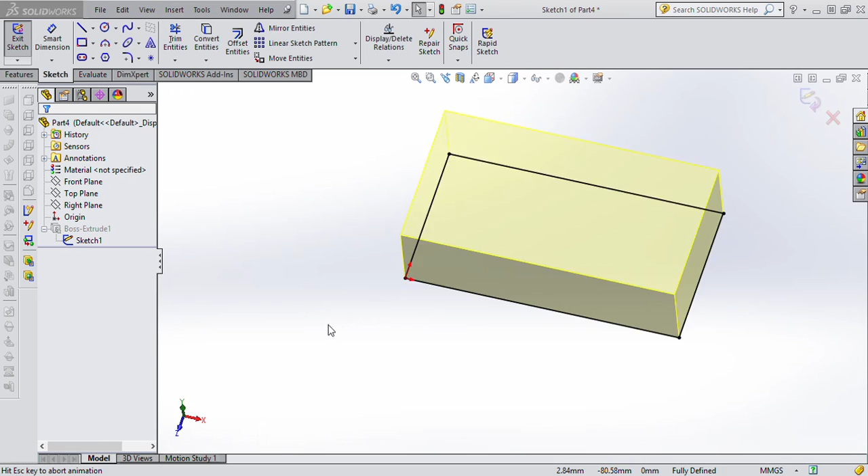If you check number 18, it seems that we made a mistake on dimensions. I'm going to come here in 3 diagrams, open the sketch, and normal to. This one should be 150, and here is 80. Now it will be much similar to the part which is given on the paper.

Okay, now select this plane, normal to, sketch and line. Using sketch, using line, I am going to create this sketch. But be careful, you have to create this line as well. All the sketches which we are expecting to create should be closed.

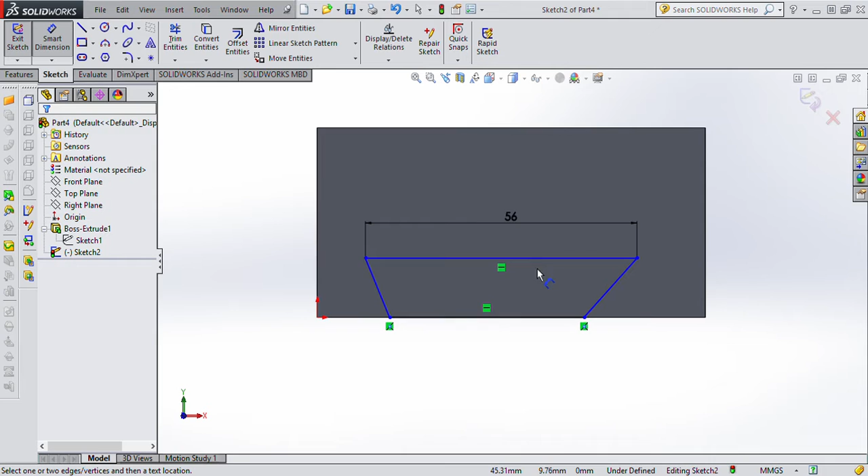Now I have to say dimension, this one is 56. Here to here is 18. Now angle between this line and this one is 60, and also among these two is 60. Very nice.

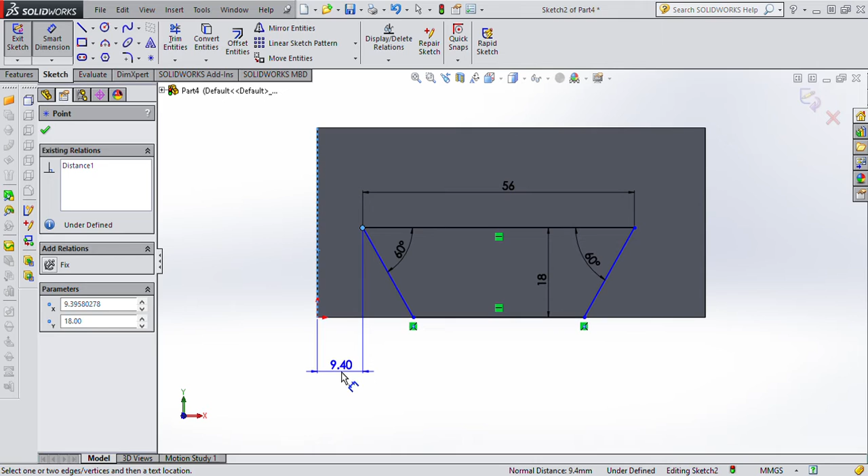80, let's say here to here is 80 minus 56 divided by 2, which is 12. Now as you can see, the colors are now black, and we can go to next.

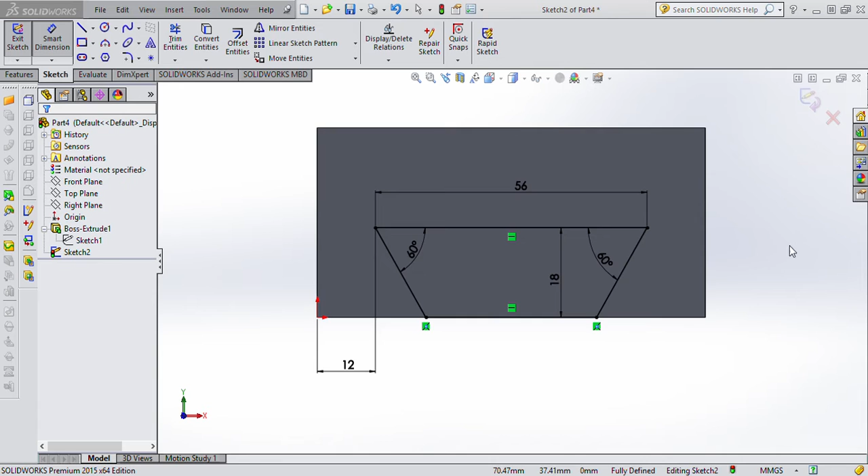ISO. Depth of this cut extrude is not given in the paper, that's why we are going to use cut extrude, and since it is not given, we will use through all.

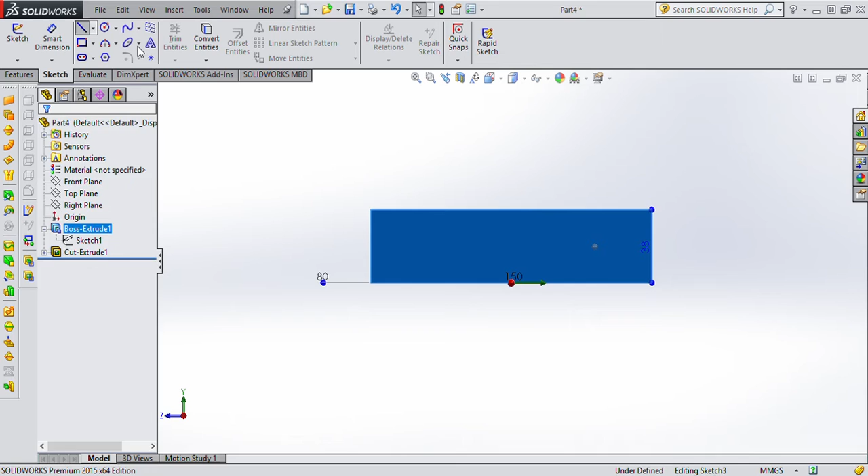Now have a look, select this plane, normal to, and now use line, sketch line, and try to create this sketch. But again, don't forget to create this line.

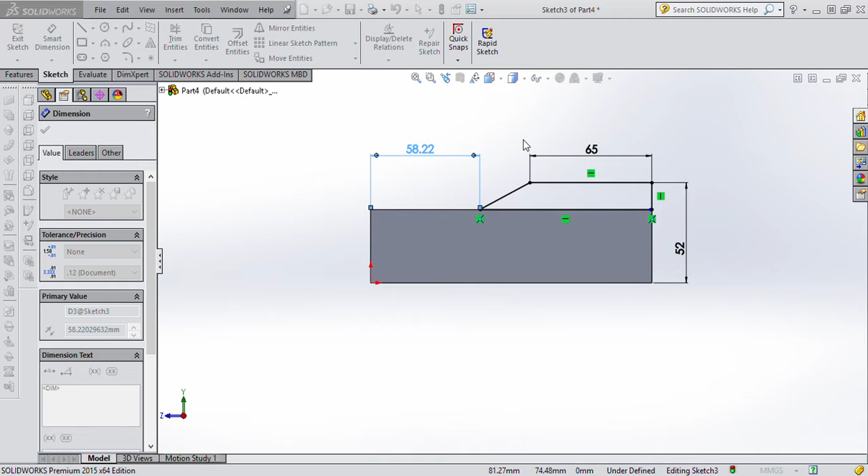Now dimension, smart dimension here is 65. From here to here is given as 52, and point to this edge is 60 on the paper. Okay, you have to create this sketch, it should be black, and let's continue by

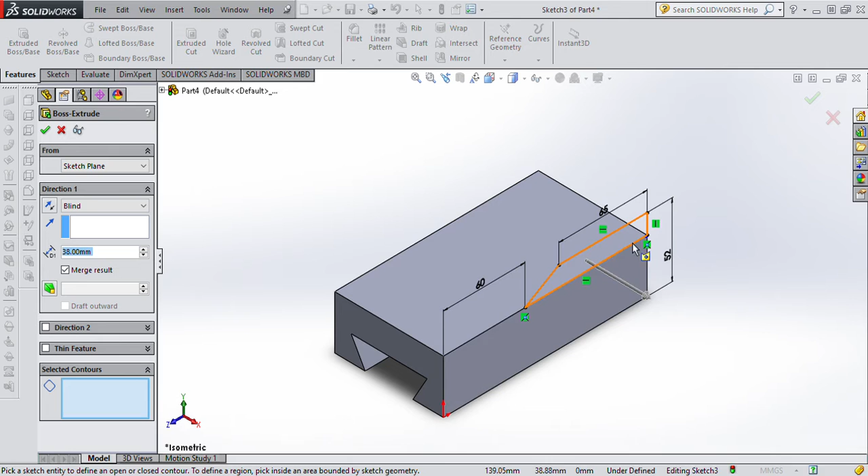isometric, extrude. Here you have to select the plane. In my case, you have to select this plane because this edge, here I have a problem. Sorry, no, you may not have this problem in your case. This is an extra line, and that's why I have to delete this line.

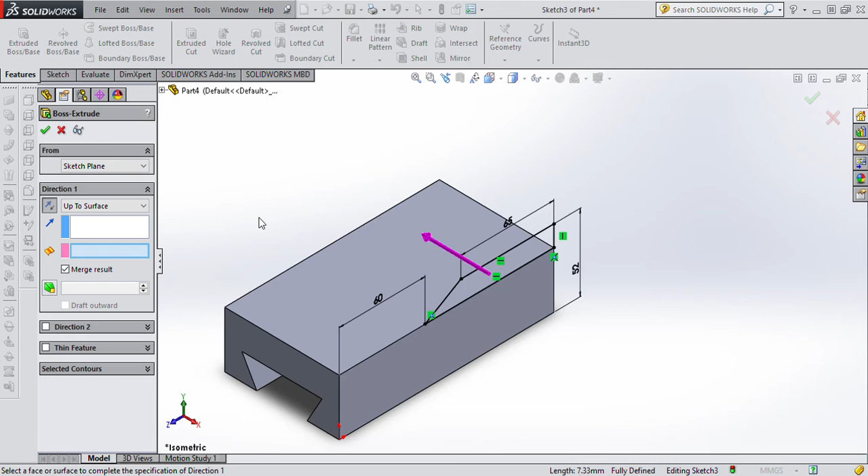Okay, now extrude, reverse the direction, up to surface. Now rotate your model and select this surface. Isometric. Here is my part.

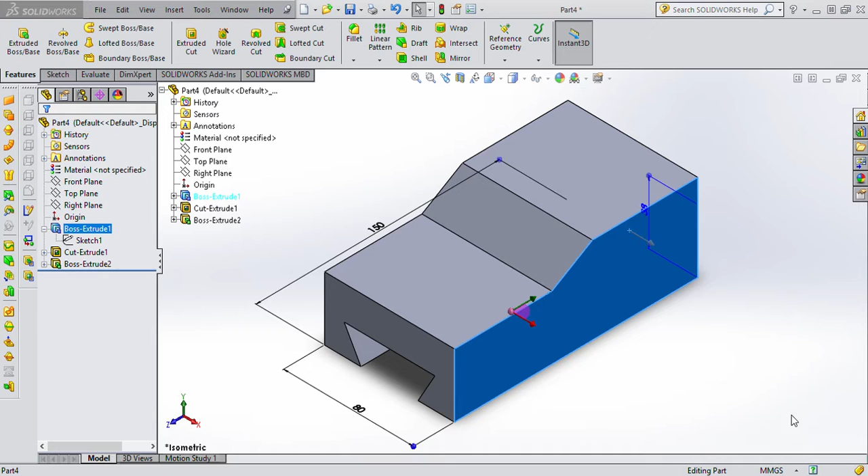Now again, I'm going to work on this plane, normal to, line. Use line and create this sketch. Be careful, as you can see in the figure, all my lines are horizontal or vertical. Okay, and I have a line here.

Now let's say dimension, let's put dimension here as 50. This one, and this line is equal, and also it is 16. These two are equal. For equality, you have to select both using control and choose equal.

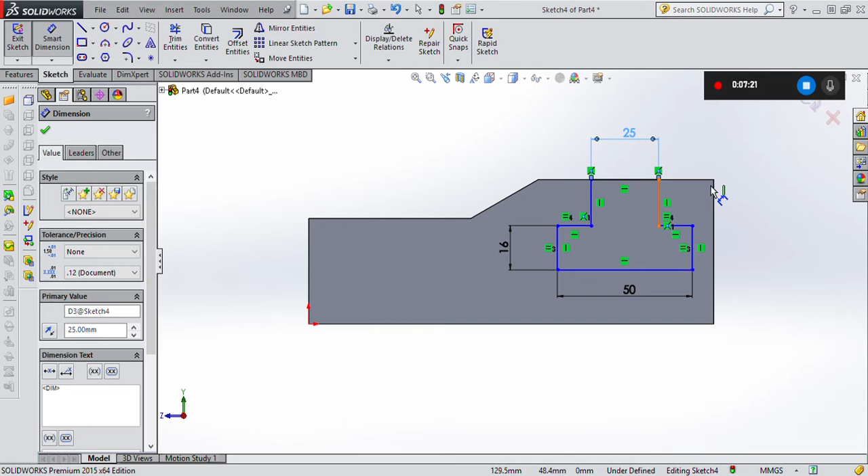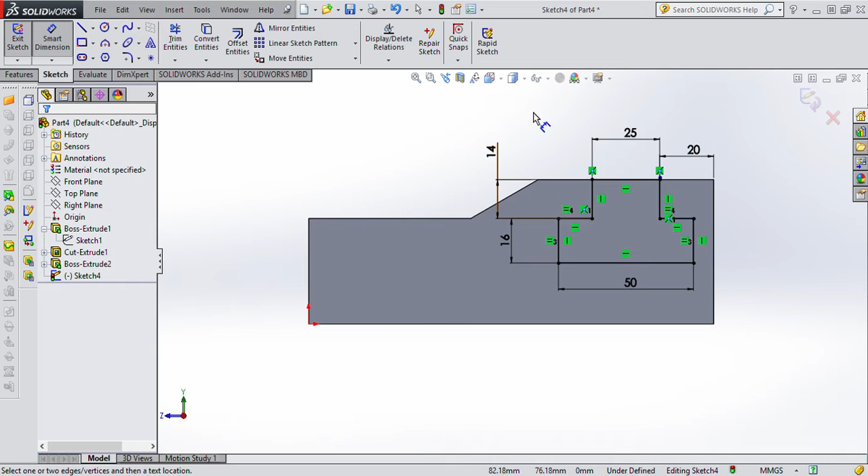Okay, here is 25. And from here to here it's 20. And also we have to put dimension for here as 14. Now, as you can see, we have a quite black sketch.

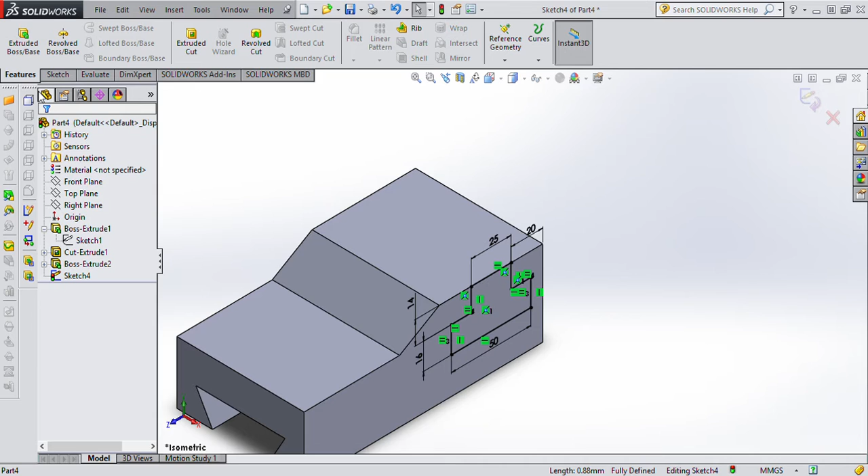Isometric feature, cut extrude. Again, I have a problem of an extra line here, but you may not have this line. Definitely, I have to delete it using the delete key on your keyboard. And now I'm going to cut extrude this one through all.

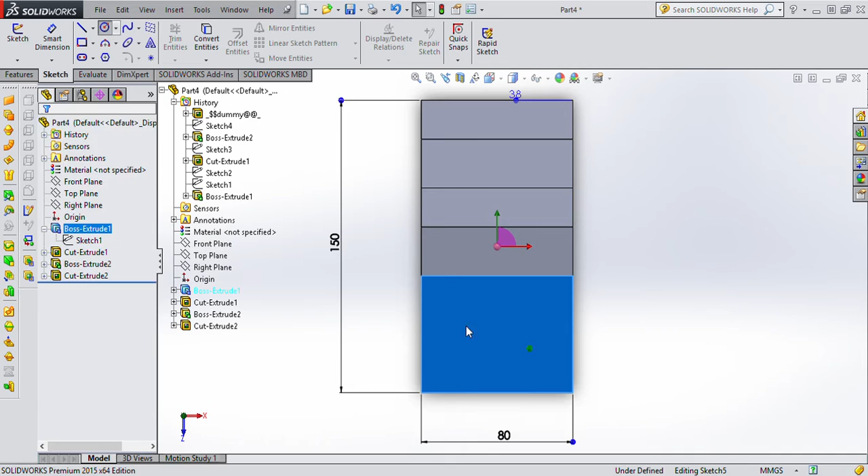Now select here, normal to sketch, circle. This is my sketch, and this one is 20. We need to say here to here as 30, and definitely this circle is not mentioned on the paper, but since it is not mentioned, we have to put it on the center. 40, 30, and 20 are the dimensions of this hole.

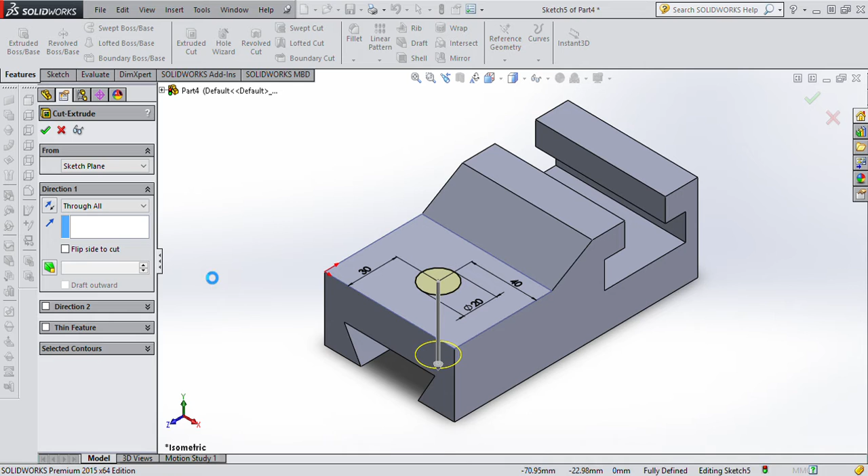Isometric, and let's say cut extrude through all, and as you can see, part number 18 is created, and you may go to save as, and you have to save this file as for 18.

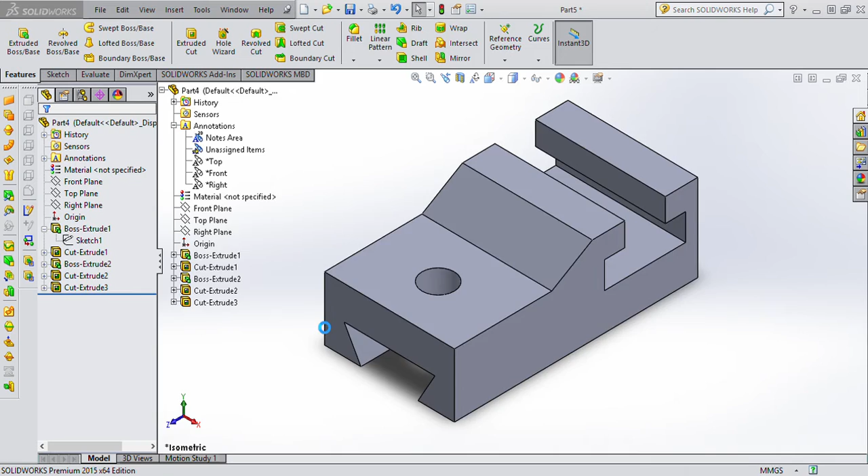Now let's go to another part, open a new part. Part 70, which is called support, is a very difficult part, a bit difficult part. That's why let's start to work on it.

Now select top, normal to, now sketch, rectangle, corner rectangle. This one is 50, and here is 138.

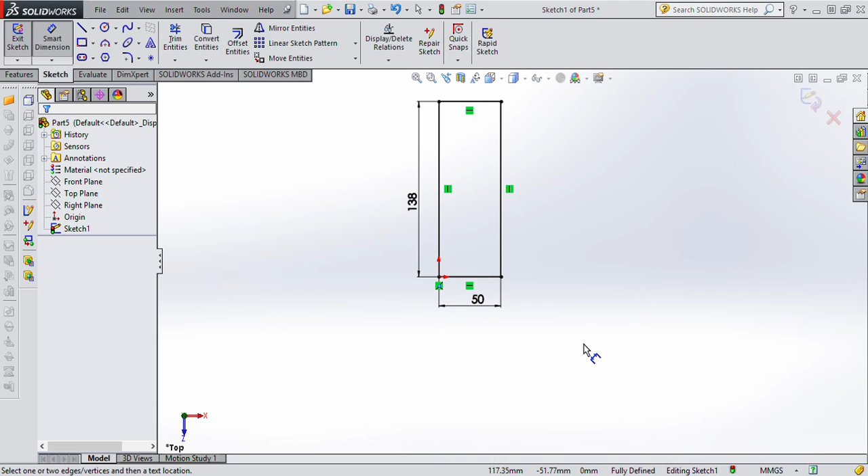Isometric. Oh sorry, this one is 138, here is 50. Okay, so this is my sketch. Isometric, I have to extrude this part as 12.

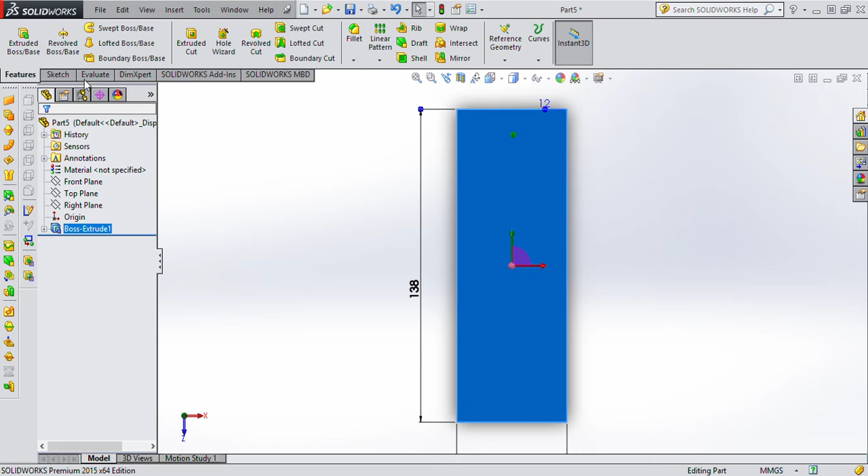Now, select here, normal to, straight slot, sketch, straight slot, make it first point, second point, and third point.

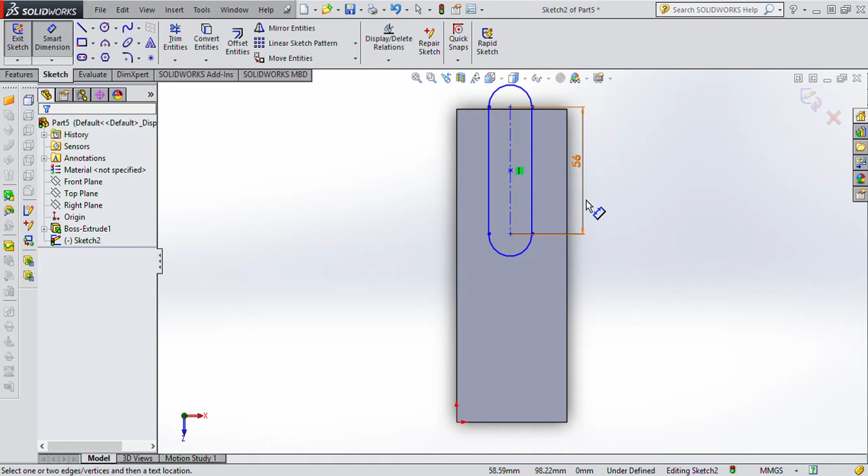Now dimension, this line is 56. Okay, this one is 6. Radius of this arc is 6.

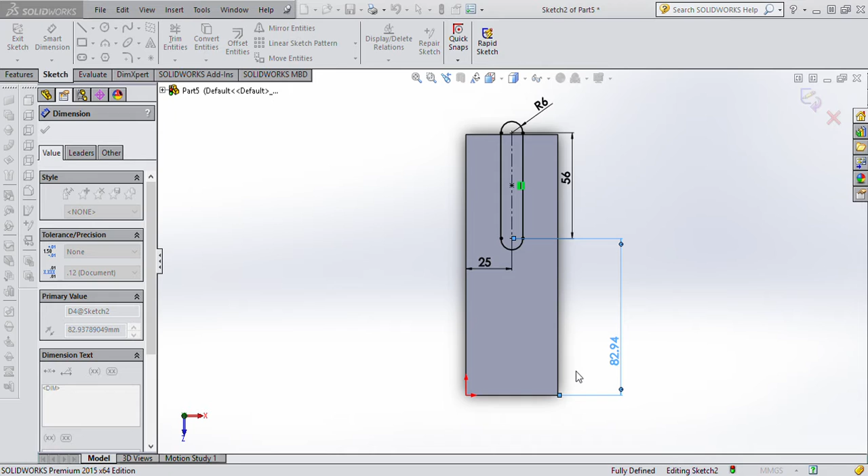From this center point to this edge, to this edge, it is 25. And the center to this edge is given as 26 plus 36. It is 62 millimeter.

Okay, confirm. You have the sketch, isometric, cut extrude, and you have to say through all.

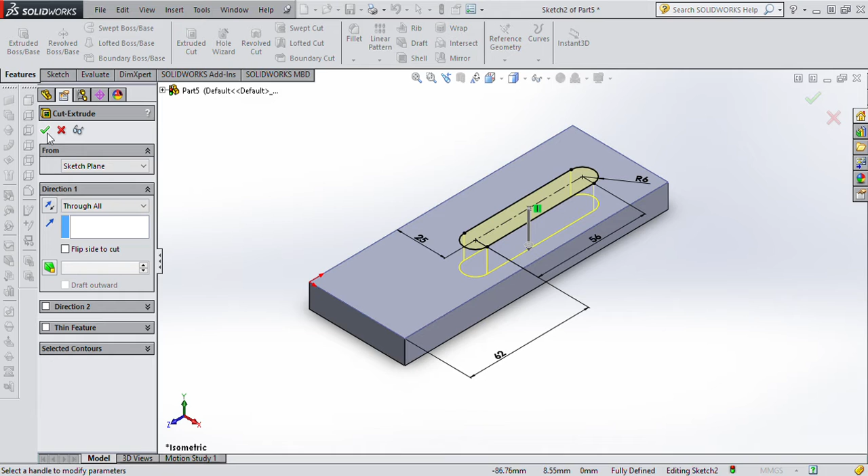Now I'm gonna show you a new technique. Actually two techniques here, but let's say firstly I'm gonna make a plane here, a plane parallel with this surface. Select the plane, this surface, and go to feature.

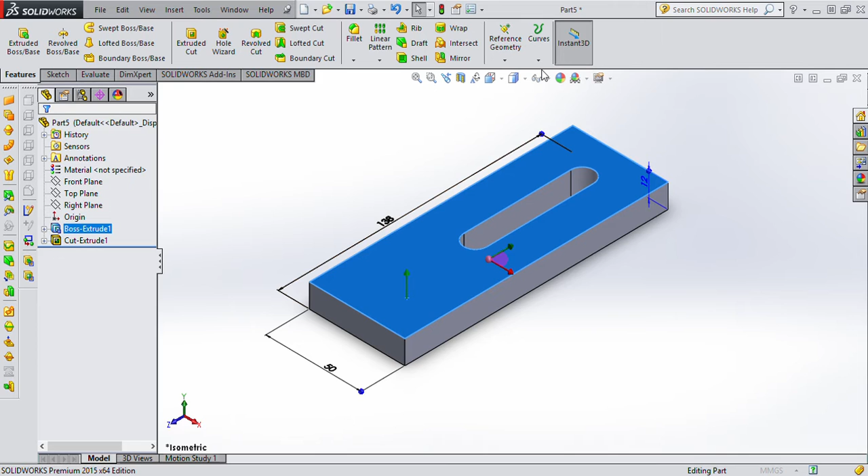Here I have reference geometry and plane. You have to come to here and select it. Now, as you can see, a plane parallel to the reference plane will appear, but the distance here should be selected as 50. It means that the distance between the reference plane and the plane I'm gonna create is 50.

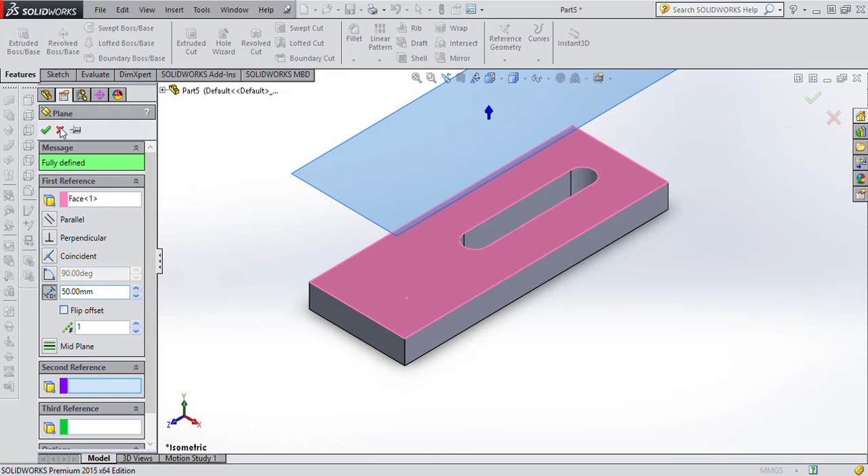Now, firstly I'm gonna select this plane. Okay, normal to, sketch, and a circle. Make a circle here. Dimension of this circle is 40.

Center to edge of this circle, center to this edge, is given as 26, and center to the sides is not given. That's why we have to put it on as a symmetric way as 25.

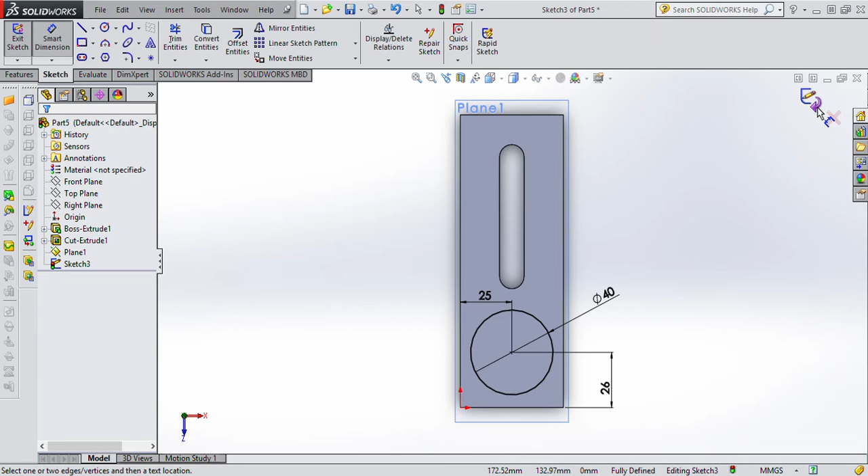Now confirm your sketch here. You have to confirm it. It will be closed, isometric. Now we have a circle here.

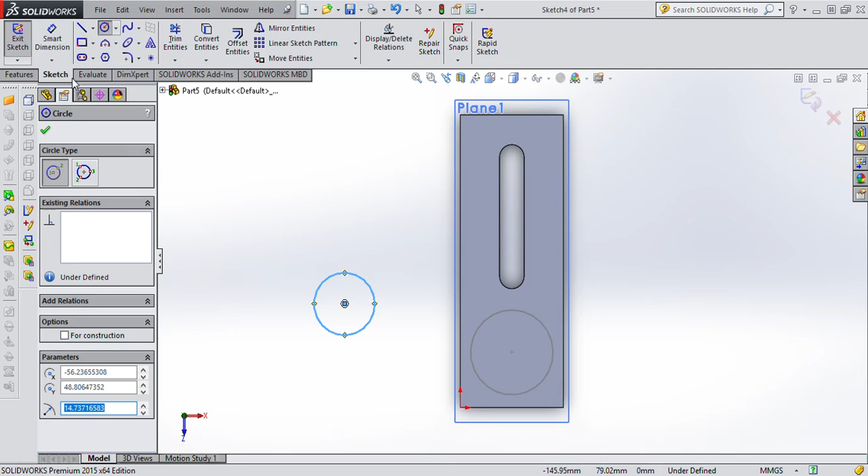I'm gonna select this plane and make another sketch here. Select the plane, normal to, sketch, and make a circle. This circle, diameter of this circle, is 30.

Okay, and let's say this circle is concentric. You have to press the control key and make it concentric with this circle.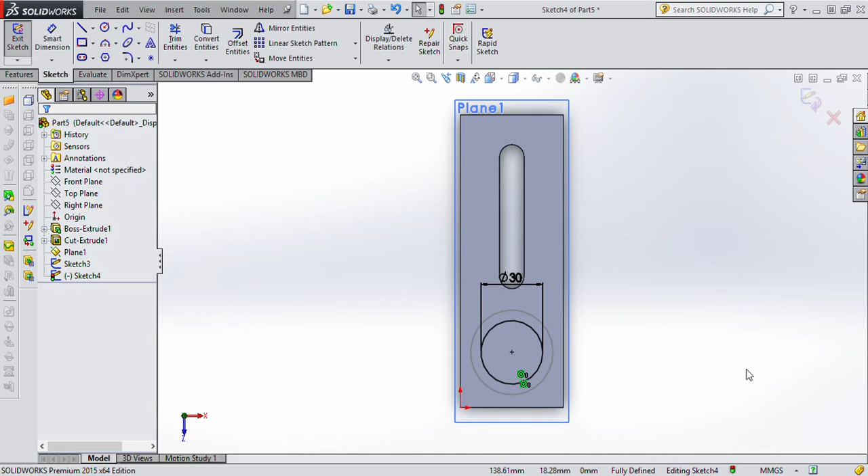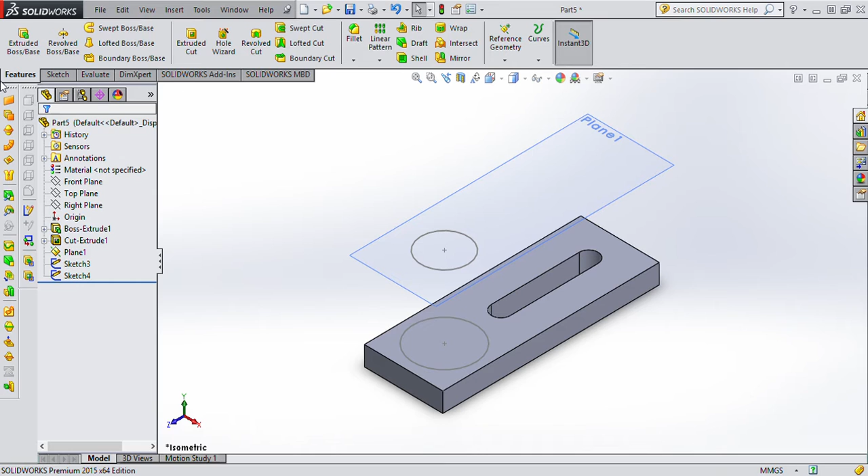Now go to feature and let's select loft. For loft we should select two sketches. Firstly we will work with, as you can see here, you can open your tree diagram here. Firstly I'm gonna select sketch 3, which is located on the base plane, and then sketch 4 on the new plane.

Remember, in a previous lecture I tried to show you a loft example, but if you change these points, look, the shape of the loft will change. So these points are very, very important actually.

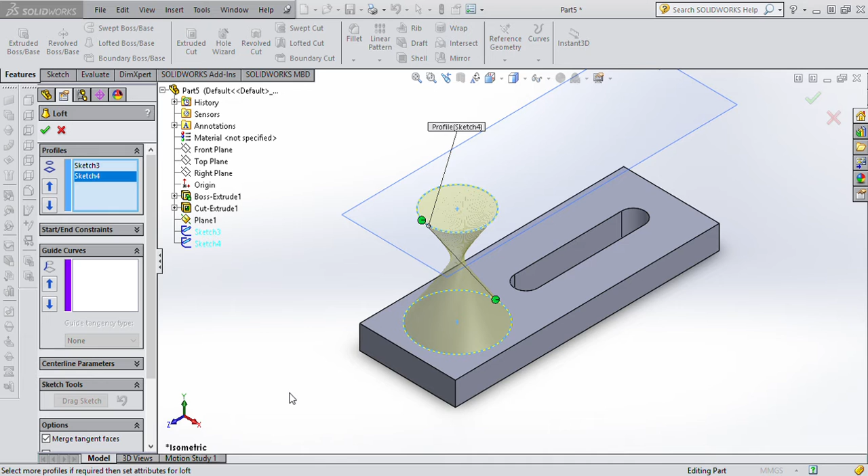That's why I'm gonna have a look on the left here. Okay, ISO, look, I'm gonna select this plane, and now I'm gonna put this point on the farthest possible location.

And this one also on this point. So if you do so, look here, I'm not able to move this point more, but I can shift this point to this point, for instance this one. But if we do so, look, this is the center of the circle and here is a point which I'm gonna put.

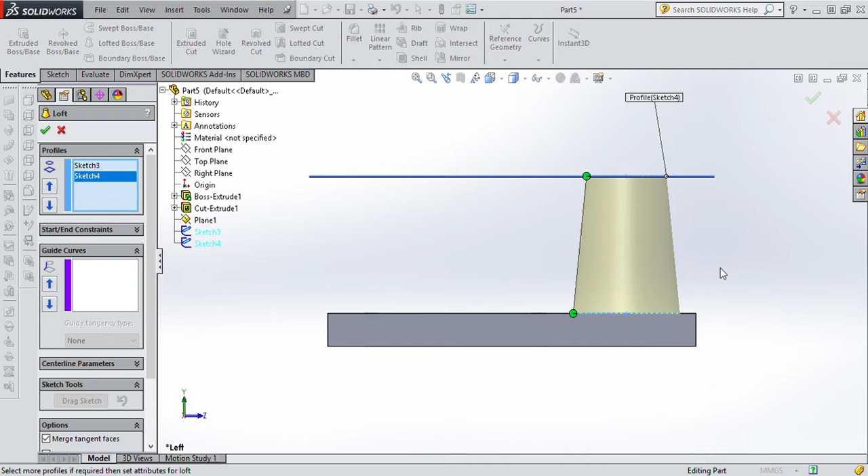Okay, on the farthest point, and this one is very far from the center. That's why, the parts which will be created here, we can be sure that this is a conical part. Now isometric, confirm.

Okay, now we already used this plane and we don't want to see this plane, but if we delete this one, definitely this sketch will be deleted and the feature will be deleted. That's why we have to hide this plane.

Two ways are possible: one is hiding the plane from here by right clicking on the plane. It means we are not gonna use this plane, and whenever we need we can come back here and click on show, and definitely the plane will appear. So at this time please hide the plane because we don't want to see this plane again.

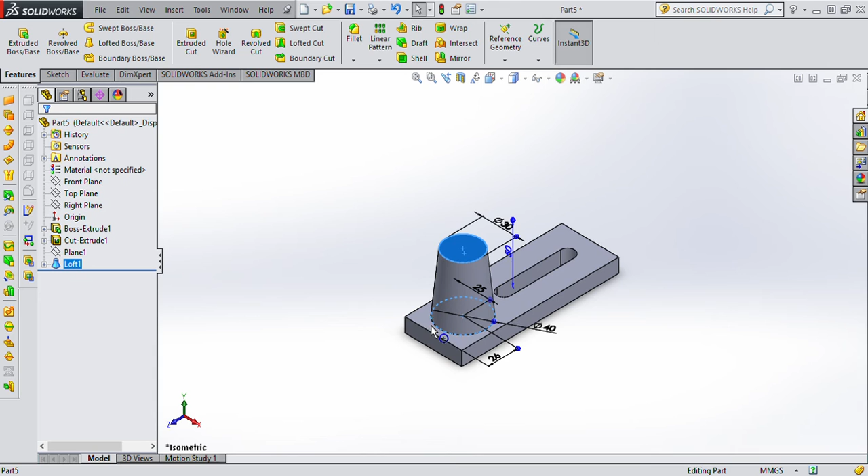Now select here, normal to, circle, make a circle from the center of this point, but if you have problems with the centers you can create this circle outside of the part, for example as me. Okay, this one is 18.

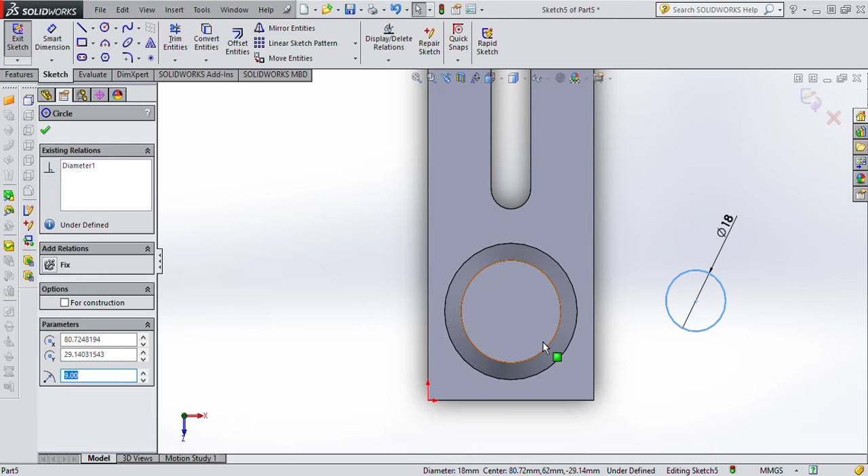Okay, and very quickly we can say that this circle control with this circle is concentric. Now we made a concentric circle on the plane, on the top of the perspective. Look here, I have a circle, and now I'm going to follow up my way with features and extrude through all, cut extrude, sorry, through all.

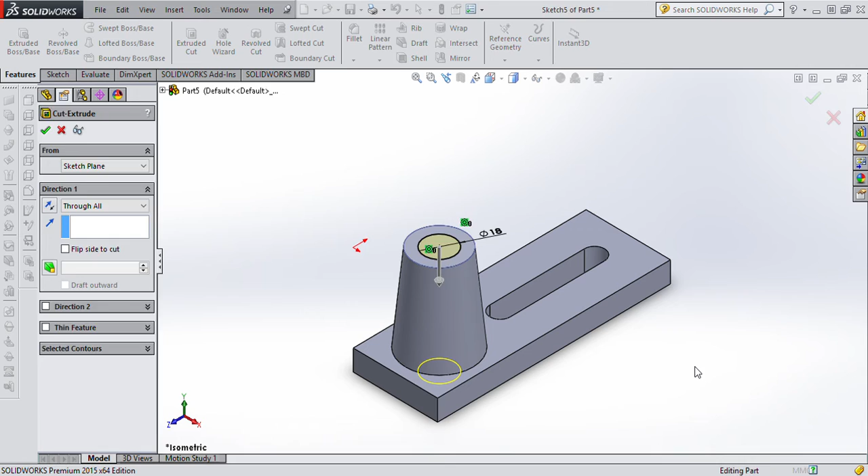Now again I'm going to create another plane. Look here, select here, and then reference geometry and plane.

Now firstly, the plane which I'm looking for is not on this direction. That's why here select flip out offset, okay, and put the distance as 6 millimeters, and confirm the plane. Now as you can see we already created the second plane, which is called plane 2.

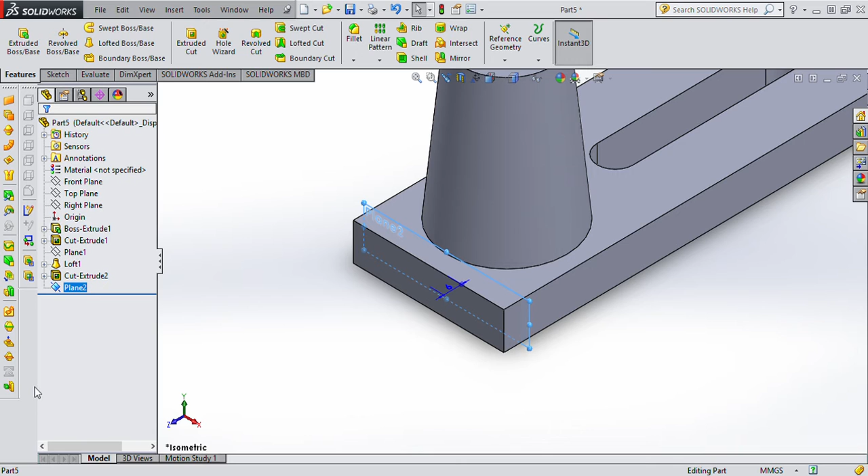Now select plane 2 on your tree diagram and normal to. If you have a problem with the size of this plane, you can pick this point and increase the size, as I did. But you have to select the plane, sketch, and line.

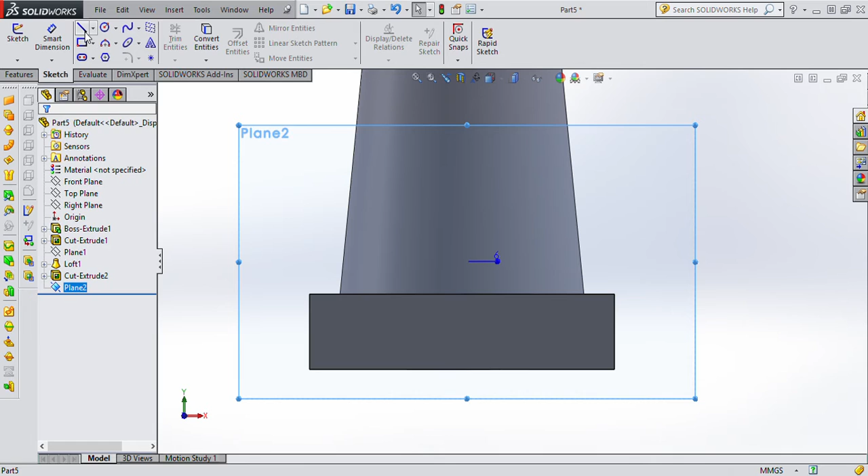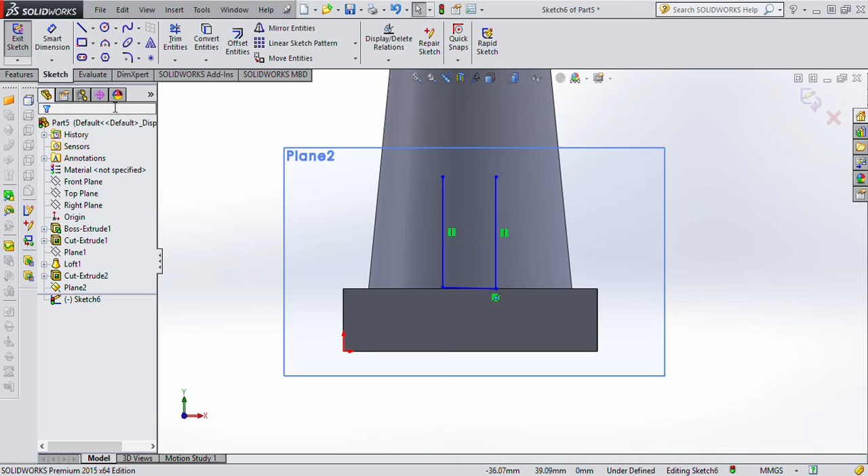First line up to here. The second line is here. Now you may use 3-point arc: first point, second point, and third point. Now I have this sketch.

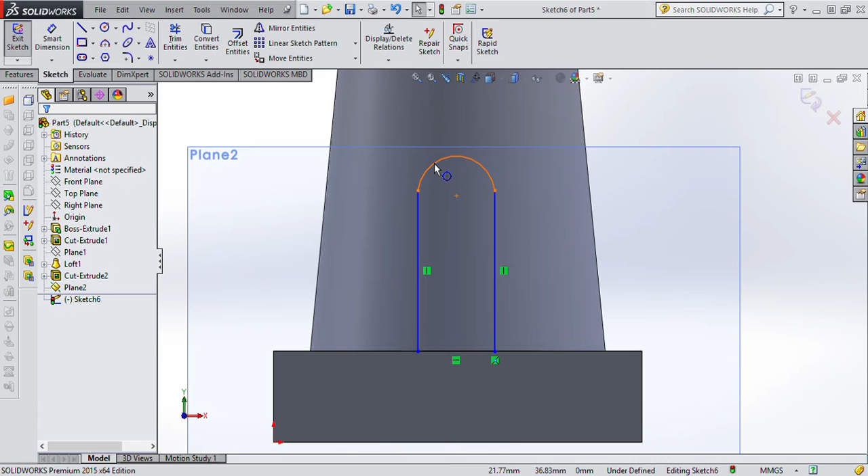Now I'm going to say this arc, control this line, is tangent. Look, the tangency sign will appear here. This one is tangent with this line, okay, very good.

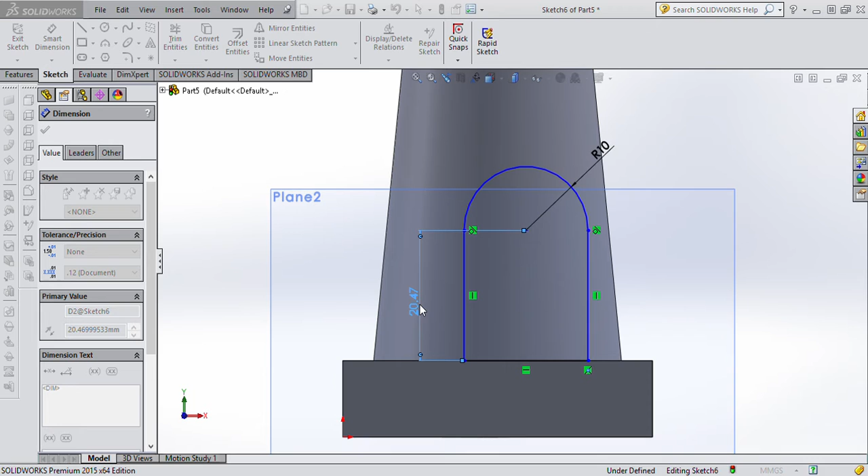Dimension: radius is 10, and the height between this center and this line is given as 28, and definitely this center to this edge should be 25.

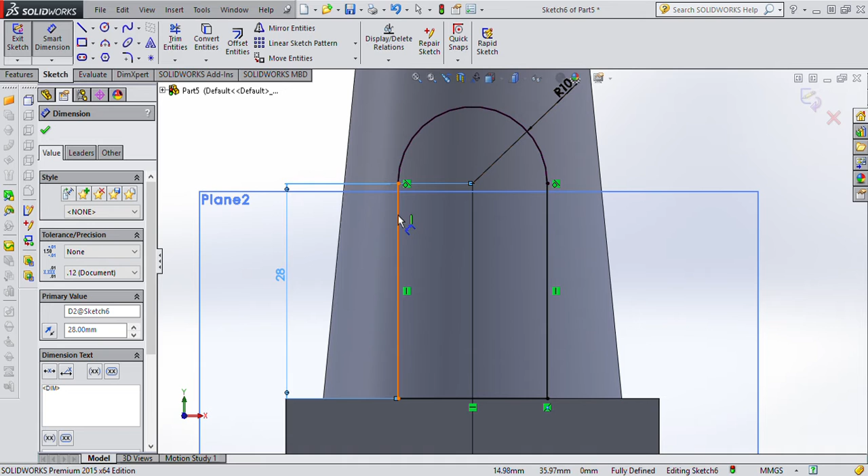We made a very good sketch here, but be careful, this circle should be tangent to this line. Line and circle, as you can see here, should be tangent, and these two lines are vertical, and this one is horizontal. So if these signs are not appearing on your model, your model will be blue. Symmetric.

Now feature, extrude, let's say up to surface, but which surface? Definitely we have to reverse direction and select this surface. Now we have a very fine extrusion towards this conical part, okay, and confirm it.

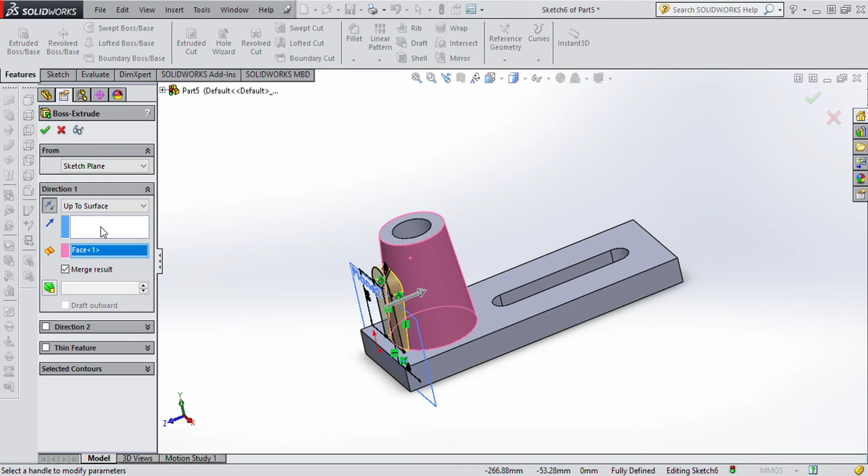Look, as you can see here, let's have a look from this side and this side. Very finely it is extruded towards the conical parts. Now I'm not going to use this plane again, so I'm going to hide it.

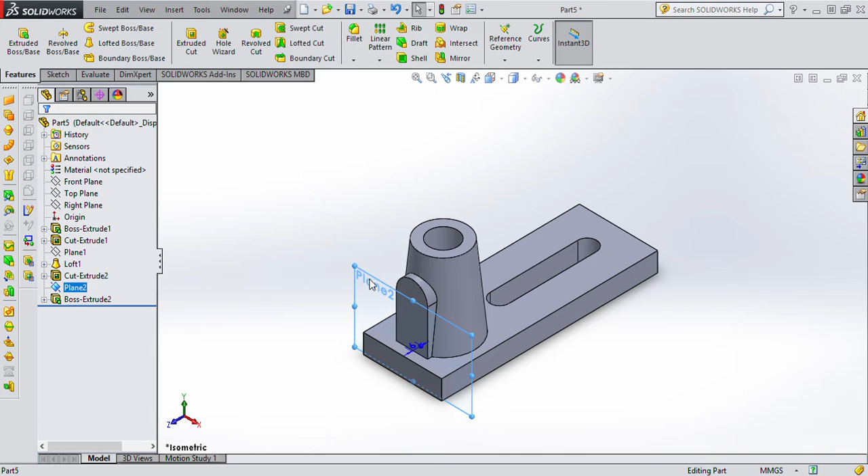Now select here, normal to, make a circle. Dimension of this circle is 10, and let's make this circle concentric with this circle by control, it will turn black. Isometric.

Now features, cut extrude, up to surface. This time we're not going to cut this one through all, we just want to cut only this side of this part. That's why up to surface, and select inside of the hole.

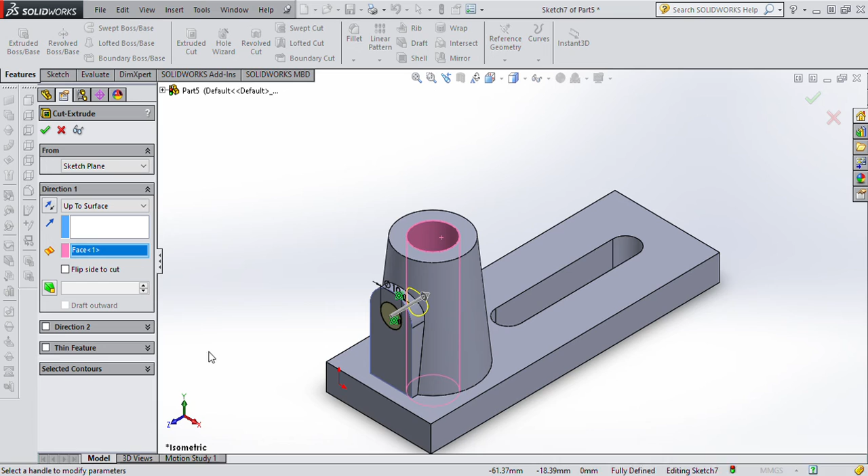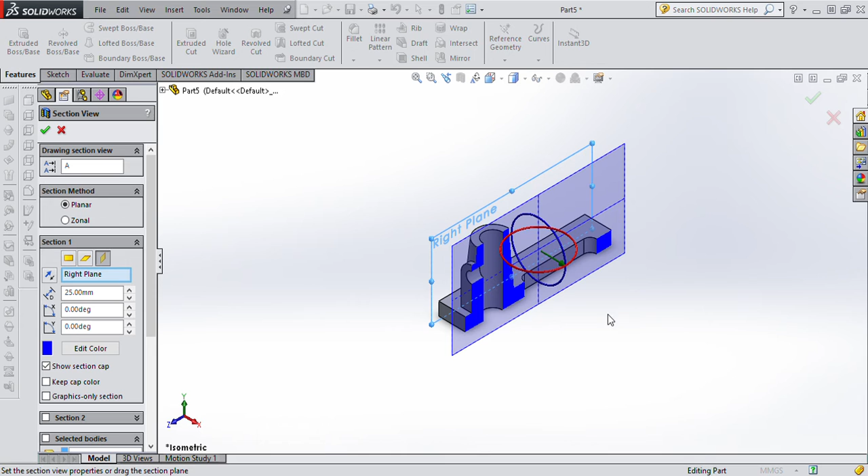Confirm it. Now if you select here right, and section, normal to, sorry, isometric, you can see the section view here, the hole is not through all. It's not through all, it is just placed on one side of the part.

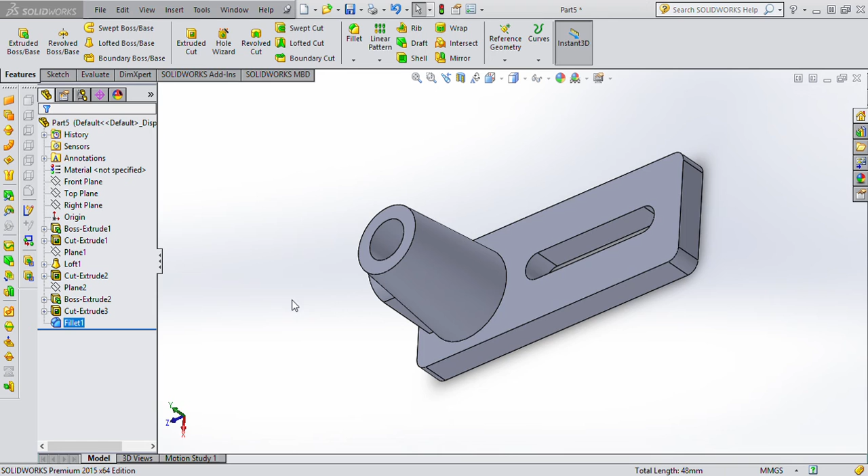We just need to make a fillet here as 5 millimeters. This one, control this one, control here, and control here. Fillet, 5 millimeter, and confirm. Now all the corners are filleted, and this is number 70 on your paper.

Now please open a new page.

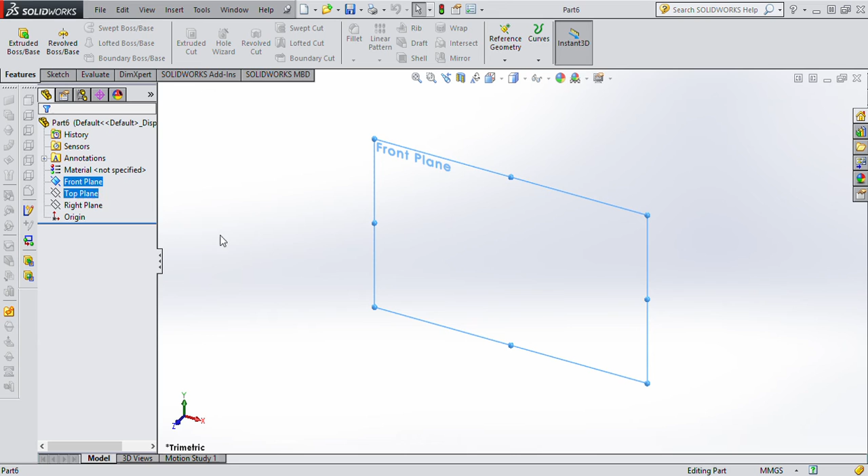Here I'm going to work on front plane, normal to. Sketch rectangle, corner rectangle, definitely. Start as always from the origin point and make a rectangle.

40 and 120. Features, extrude, 20, and confirm.

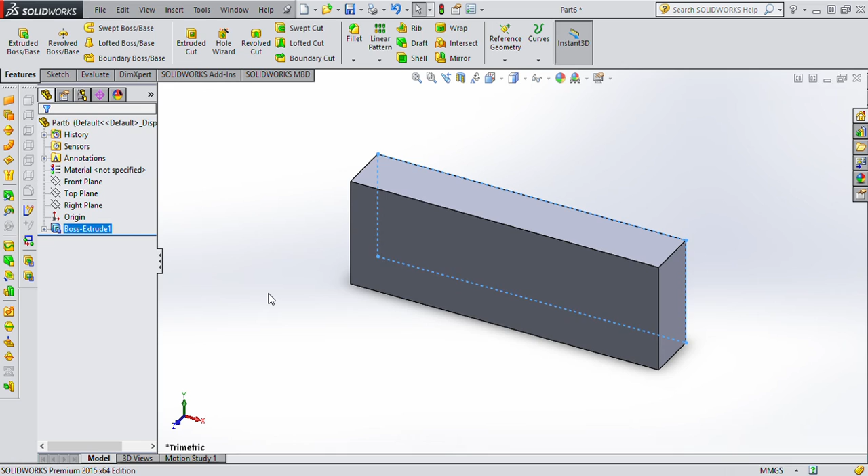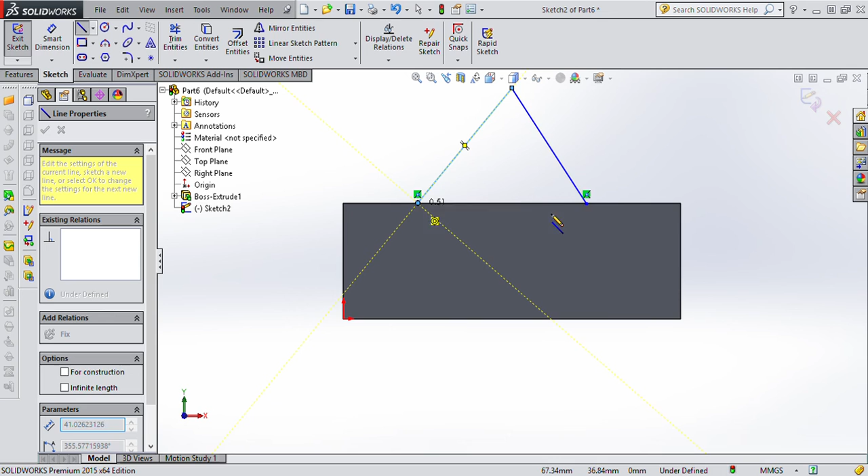Now I'm going to select to work again on this plane, normal to. Make a triangle. Look, you should draw this line as well. And it's much better to increase the size of this triangle, because we are going to make a fillet here, and if your size is too small, you will see errors.

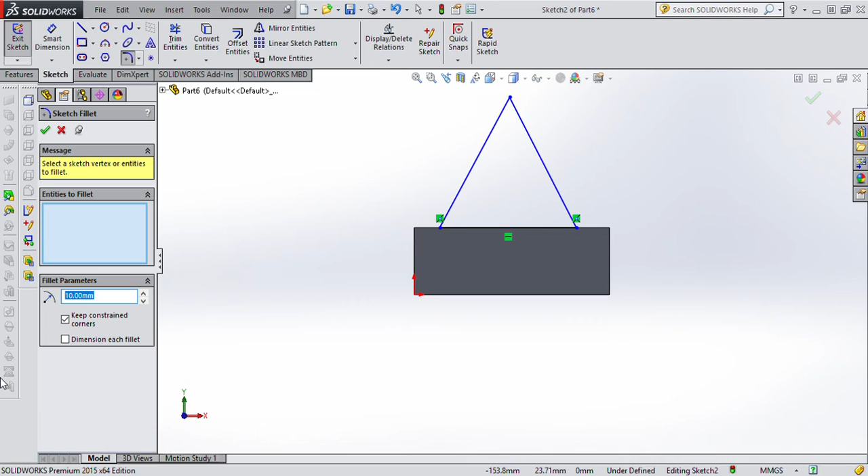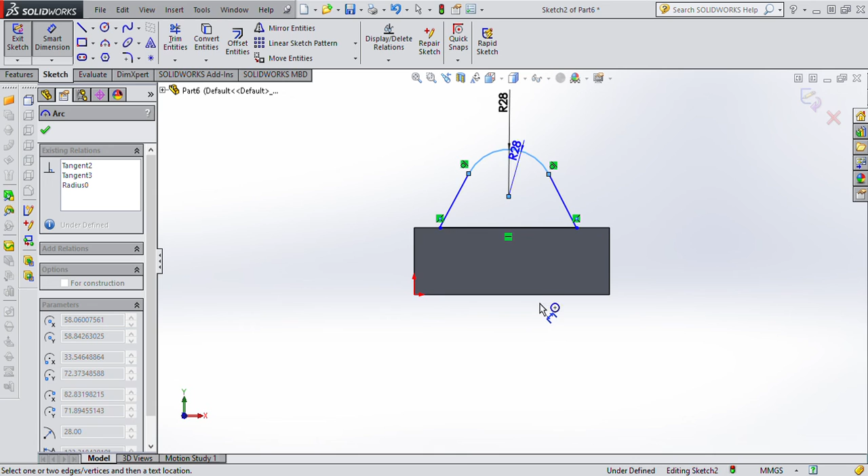Here is 28, radius of the fillet is 28 between this one and this one. Now, dimension: this center and this edge is given as 90.

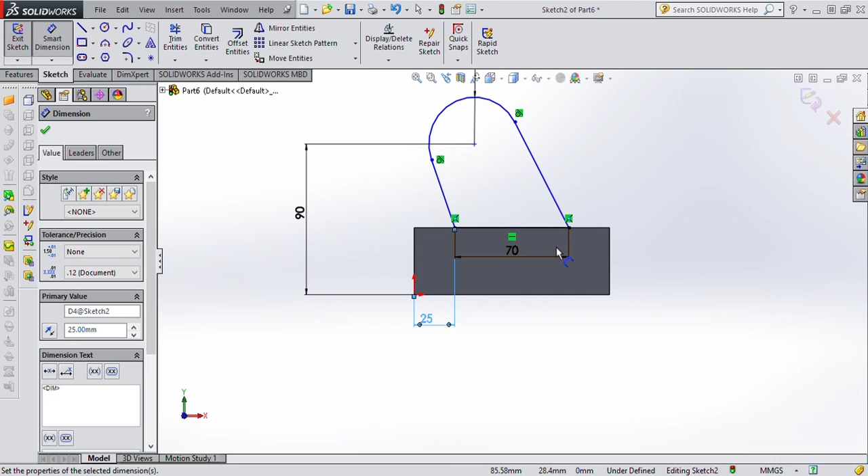Point to point is 70. So here to here is... 70 is 25. And also center of this circle from this edge should be placed on 60.

Now my sketch is completed. Feature, extrude, change direction up to surface. Which surface? This surface, and confirm.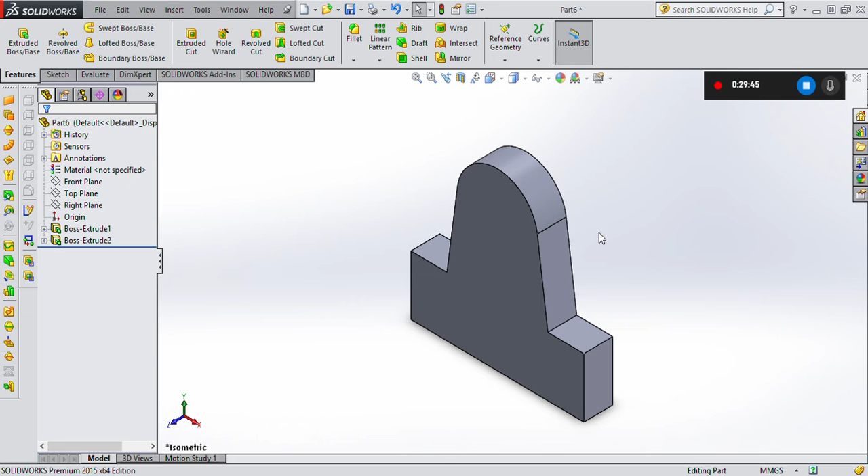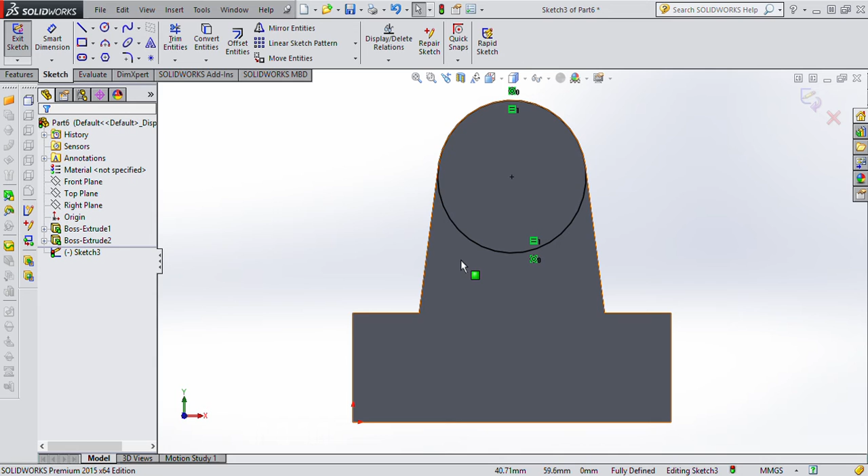Now select here, normal to, sketch, circle, make a circle. Let's say this circle and this circle concentric and equal. Isometric, extrude, 12, and confirm.

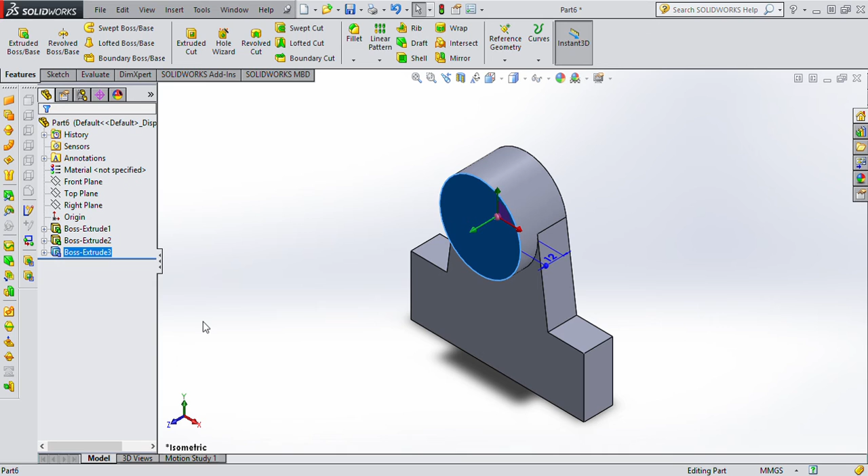Select here, normal to, circle. This one is 38, and again this circle is concentric with this circle. Isometric, cut extrude, and let's say through all.

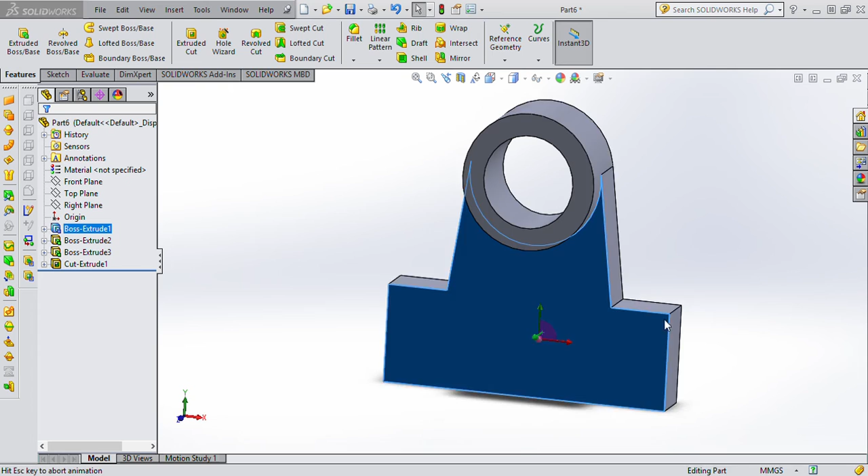And similar to number 14, I'm going to create a rib here. Now select here, normal to, sketch rectangle. Start from here and make a rectangle. Dimension, this one is 10.

Now as previous time, select this circle and go to sketch and convert entity. If you use convert entity, you will see you have a sign here. Trim, and try to trim these lines. I don't need these lines. Probably black. ISO.

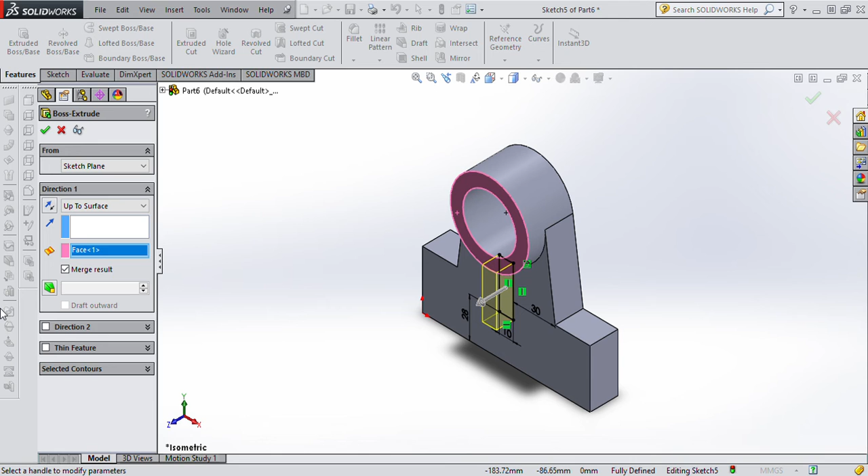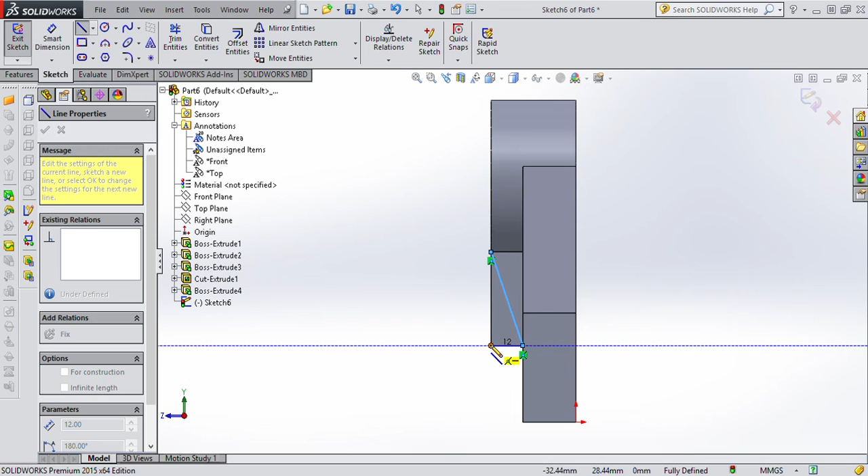Okay, very good. Now select here, normal to, sketch, and the line from here to here to here and to here. It should be black. I made a triangle. Isometric, feature, cut extrude, and through all.

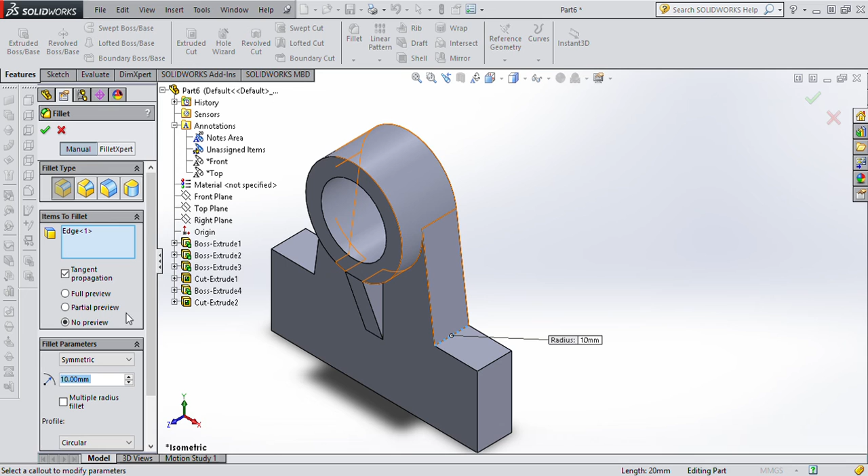Now here on the model I have a line, this one, fillet, feature, fillet as 6, and you should select this edge as well as 6, and you have to fillet these lines.

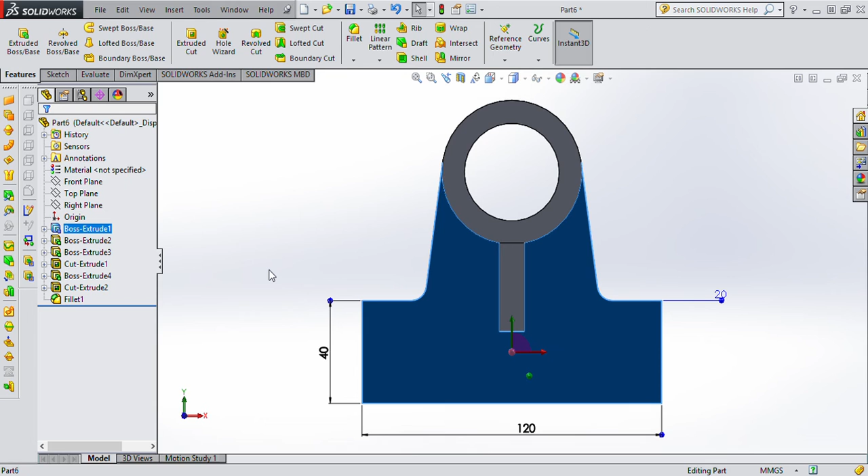Select here, normal to, sketch 2 circles. These 2, control is equal, and centers of these 2 is horizontal. Dimension, diameter is 10, distance between the circles is given as 40.

From here to here is 40, and here to here is actually 28. Isometric, feature, cut extrude, and through all.

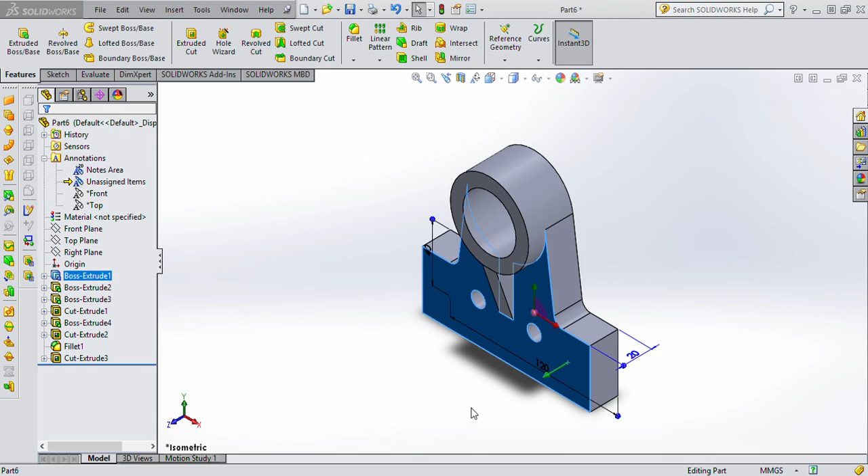And finally, again, I have to select this plane and make 2 more circles here, and let's say this one is equal with this. Diameter of the circles is 15, and let's say this point is horizontal, distance between the circles is given as 80.

Here is 20, and here to here is given as... these are not complicated parts of the work, this is simple work, but you have to complete the part. On the paper, the depth of cut extrude is given as 10. That's why I have this, but it is not through all. Be careful.

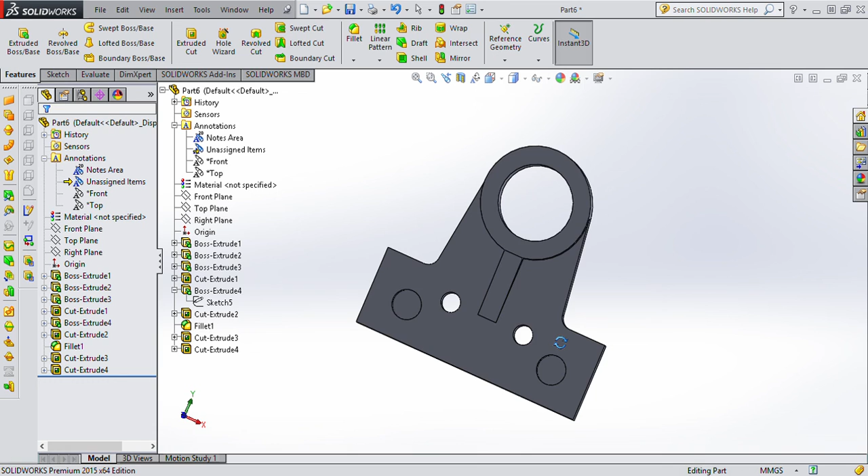Isometric. Now I'm going to complete these parts by selecting the inside of the holes, circle, make a circle here, make another circle here. These 2 is equal, and let's say 10.

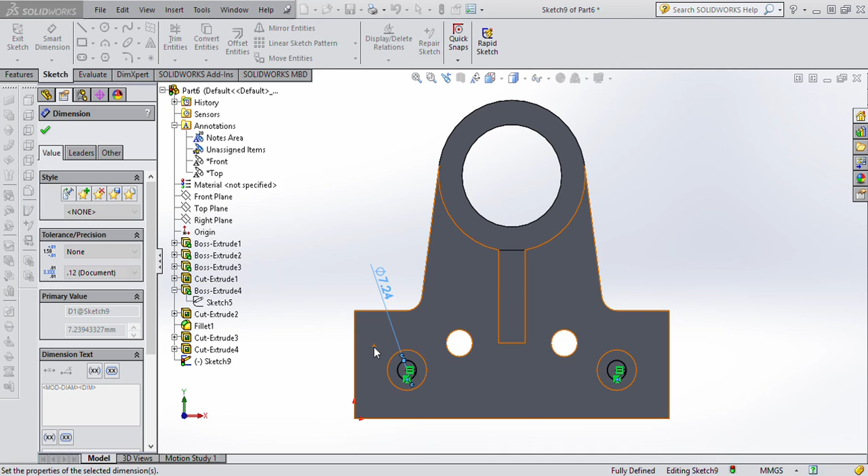And definitely we have to isometric, cut extrude, and through all. Now the only feature which I have to add is the fillets.

Select this one, here, here, and here, and in feature fillet as 6 all these edges. Oh, what happened? This one and this one should be filleted.

This was the end of our today's lecture. We had actually 6 parts. All the 6 parts I tried to show you how we can create these 6 parts. You have time up to next week to create these parts and submit to the portal.